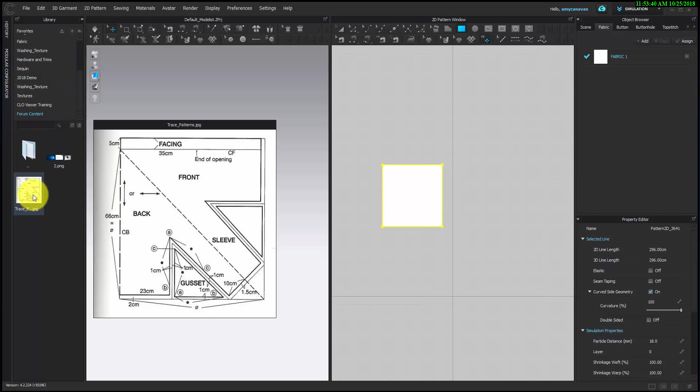Next, you're going to apply the scan as if it is a surface texture. Now we want to figure out how to get our scan to be the same size as our true-to-life pattern. So the next thing I'm going to do is use the internal polygon and line tool to create a reference line so that I know how big the texture needs to become. In this case, mine is 66 centimeters.

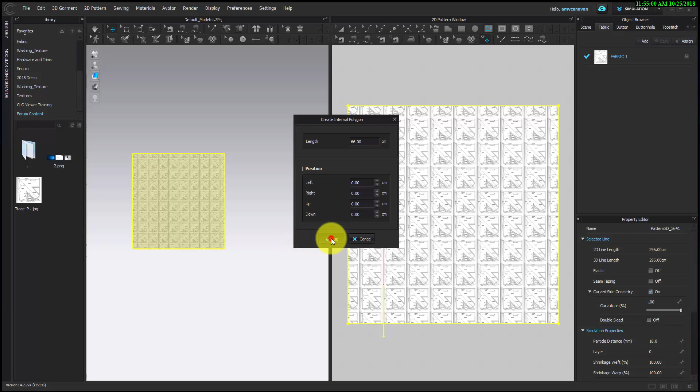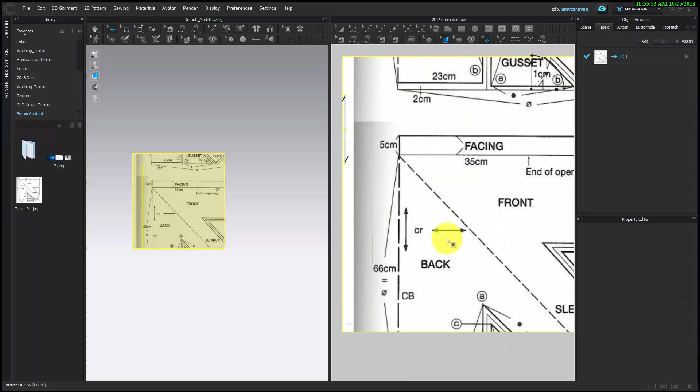Once I have my line, I'm going to adjust it on the pattern to get it so that it's centered there as a reference for me. And then I'm able to scale my textures by clicking once on the pattern piece and then using the diagonal line to drag and make that texture larger or smaller, always clicking and dragging on the pattern piece to align my reference mark on the pattern with the reference line that I drew in CLO.

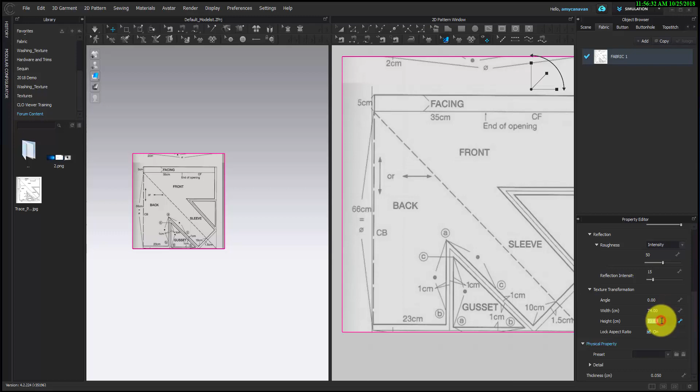If you'd like, you can click on the texture and then on the fabric itself, and open up the tab for texture transformation. If you know your image size, you can also scale it automatically there to match your proportions. In this case, I wanted to get it as close to 66 centimeters as I possibly could, so I manually increased the height centimeter by centimeter until my line lined up exactly.

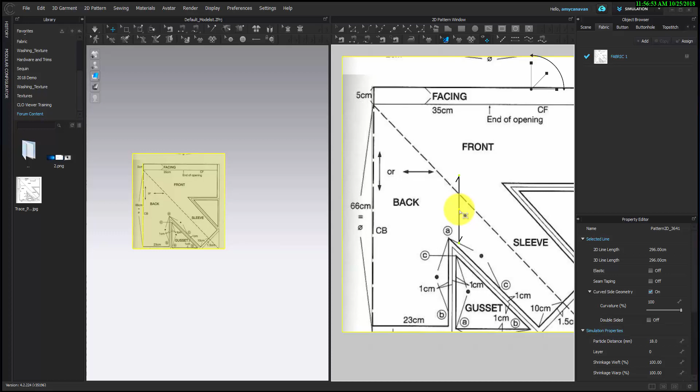Once the texture is aligned exactly where you'd like it, you can delete that reference line as you won't need it anymore. And then you're ready to trace out your pattern.

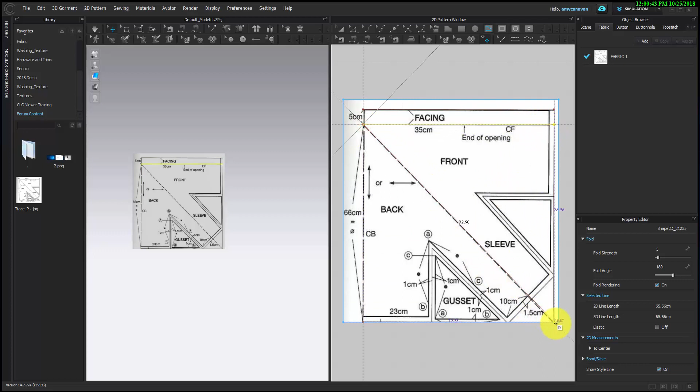So with the internal polygon and line tool, I'm going to simply trace the pattern edges. I'm going to trace the reference shoulder line and the facing piece, as well as some of the seam allowance.

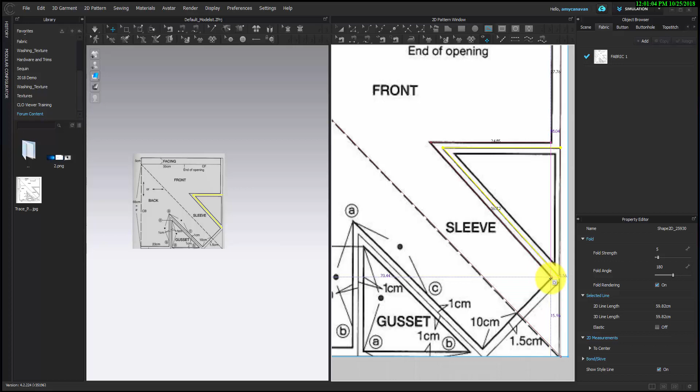And the body pattern. Don't be afraid to zoom in so that you can be very precise.

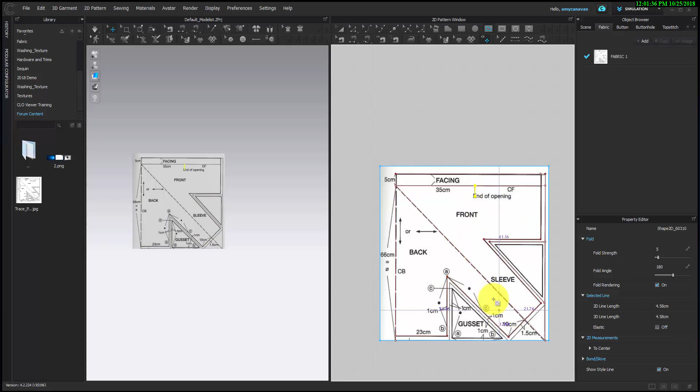Once I've traced the body pattern, I'm also able to mark out where the center front opening should be and trace each gusset.

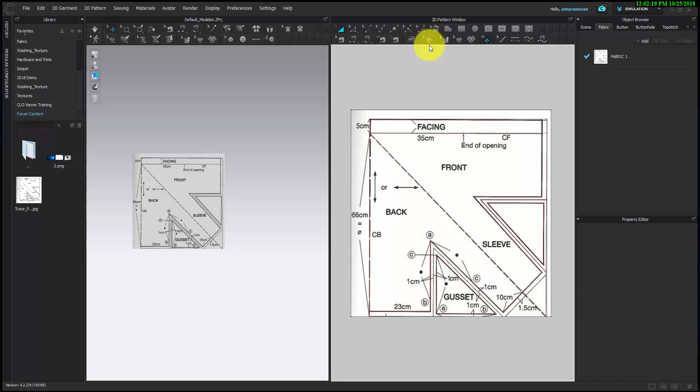Once I have all the lines that I need, I'm going to turn off the textures in the 2D window so I'm able to check the pattern.

The next thing I'm going to do is with the transform pattern tool, I will right click on the gusset pieces because they are full shapes, and I will clone them as a pattern.

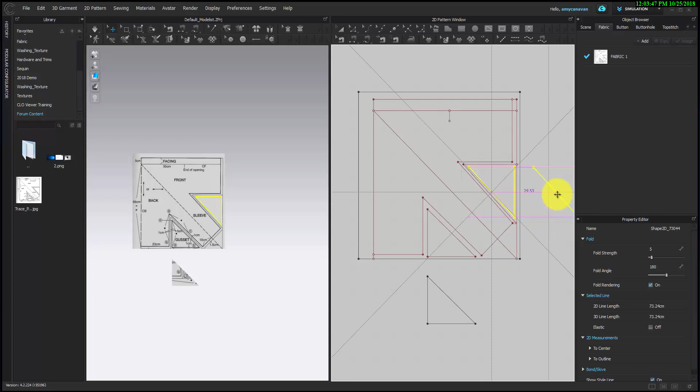However, for the body pattern, I'm going to need a different tool, called trace, as well as for the facing. So for trace and for the facing piece, I can select all of the lines that are interacting with the facing, right click on one of those lines and choose trace as a pattern.

With the body pieces, I'm going to trace the exact same way, selecting only the outside edges that I need. Right click and choose trace as a pattern.

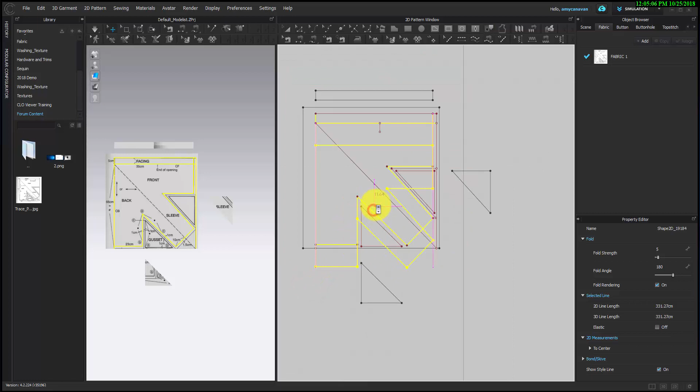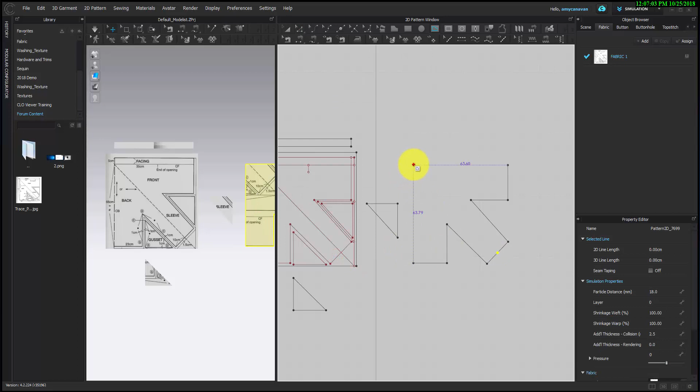Now I have a facing, a body, and two gussets. To mark my shoulder line, I'm going to split the sleeve in half and then draw an internal line from the top point to the split.

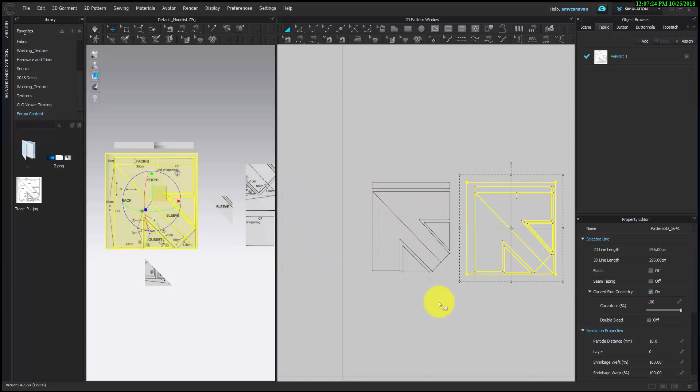I'm also rearranging and organizing my pattern pieces to make them a bit easier for me to understand, as now I'm going to have to put this together. So I'm going to move my scan and tracing out of the way and just work on the pattern pieces that we just created. I'm going to bring in one of the default avatars into my 3D window.

Then I can do a select all and move those patterns out of the way in 3D so I can just focus on the avatar.

Right now I'm marking the center front so that I know how far to sew to. And naming my pattern pieces, so select the pattern piece and type in the name that you'd like, and that will always be there.

Since I only have half a pattern, I'm making a symmetric copy so that I'm able to just sew half of my pattern.

Now that I have both sides, I am able to start looking at arrangement. So I'm shifting the pattern pieces over in the 2D window to make it a little bit easier for me.

Then I'm selecting the body piece and adding it to one of the arrangement points.

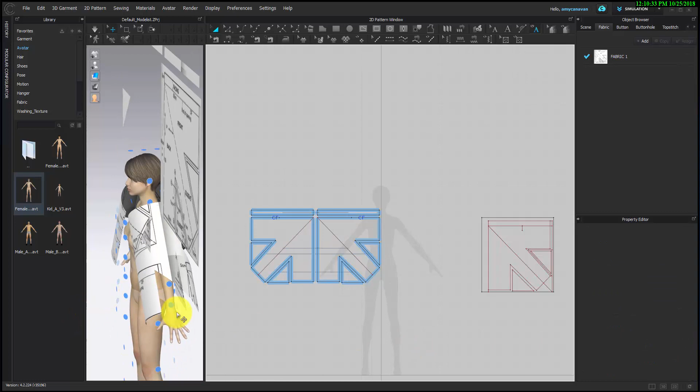Since this is kind of an amorphous shape, it's a bit challenging to use the arrangement points. However, I selected one on the arm, and in the property editor under arrangement, I changed and increased the offset to 100 so that it would be farther away from the arm, so as to wrap around the whole body.

Then I realized I put it on backwards, so I switched it around.

Now I can see clearly that my center backs are on the back, and I'm marking those with a pattern annotation.

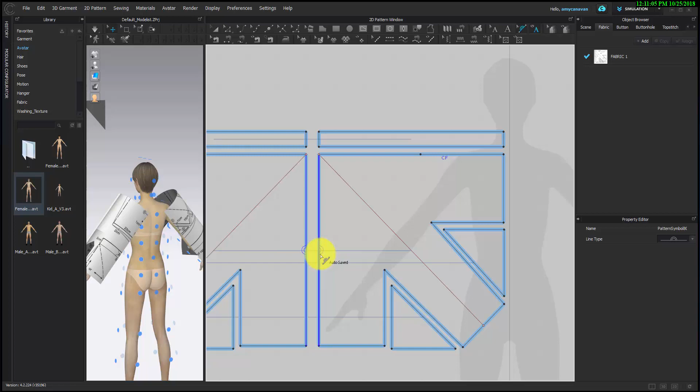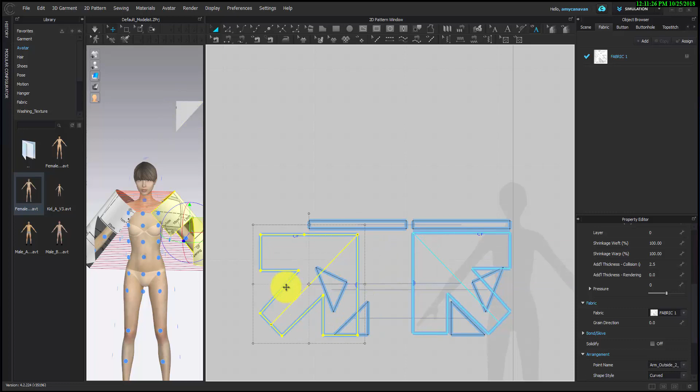Now I'm sewing the center back and center front together. I'm also going to sew the gussets into the sleeve. However, I'm going to rotate them slightly as they get sewn in a different direction than they are cut.

Using free sewing, I'm able to select the shorter edge, and the directional sewing indication notch will tell me how far down on the sleeve I'm able to go.

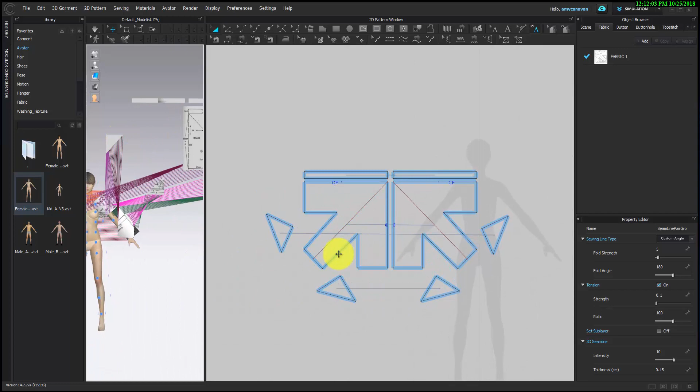Because I have a symmetric pattern with sewing, I'm able to only sew one side. Instead of bothering to arrange these with arrangement points, I just superimpose them to the side. And once I'm ready...

I assign it to a new, more plain fabric, and I'm able to simulate.

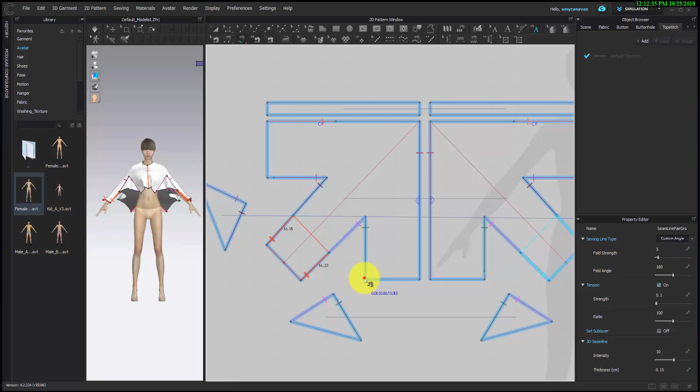I can see here that I still have not sewn my undersleeve seam, so I'm doing that with free sewing now, where I select the wrist area, as well as the side seam, which is still unconnected.

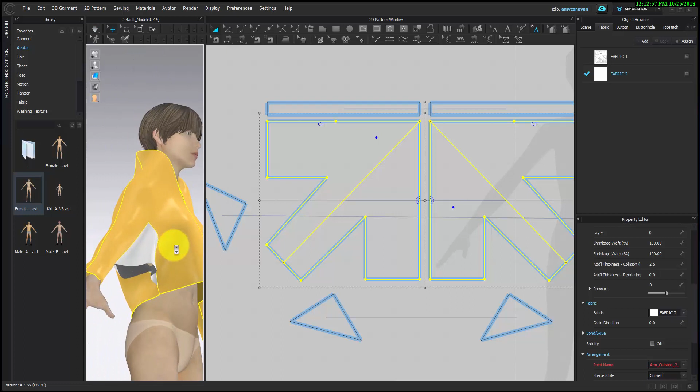To give the back more rigidity, I am strengthening those pattern pieces and allowing them to simulate in their strengthened state, which is a temporary setting.

Then I sew the gussets closed, and unstrengthen the pattern.

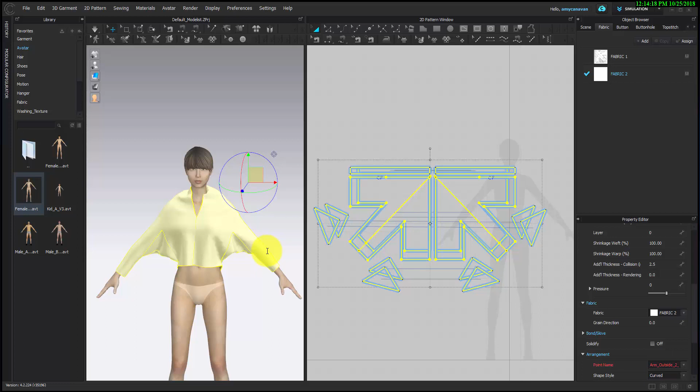Then I made the entire pattern 5% larger, bringing it to a total of 105%, so that I could adjust the fit slightly.

Now I'm measuring the width of the facing, and I'm offsetting an internal line from my center front so that I am able to sew the facing into the front of the garment.

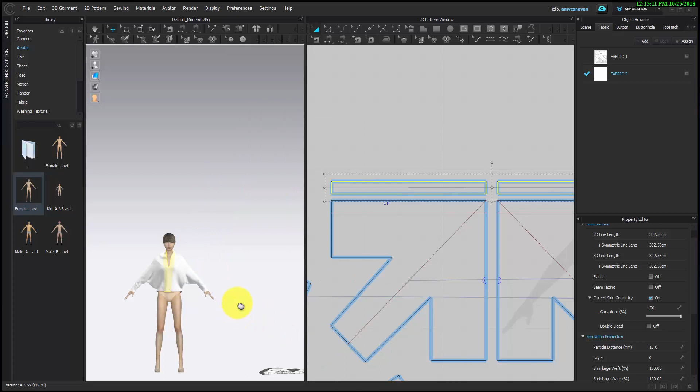Since these patterns were not in use, they were deactivated. I'm activating them and superimposing them underneath the body fabric.

Here I'm checking to ensure that all of the sewing seam line types for the facing are set to turned, because that will press the seam closed as opposed to open.

Next, I'm ready to change the pose. So I select a new pose, change the joint rotation and translation, and I'm watching my avatar change from T-pose to attention pose.

I'm able to delete my original tracing because I don't need that anymore now that I have my pattern.

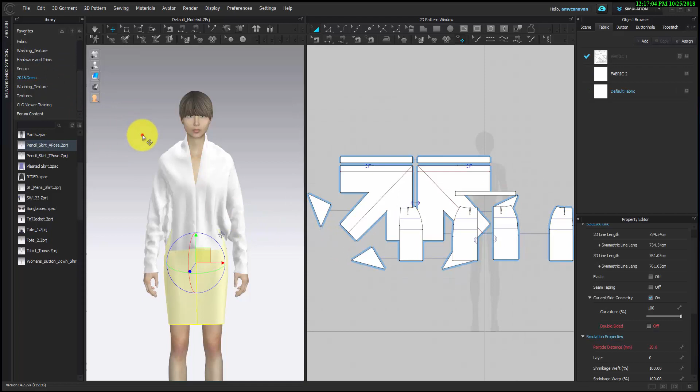Now I'm adding another garment into my workspace. So I've added a skirt. I've unchecked avatar on the additional import.

And moving the pattern pieces out of the way so that I can still freely edit everything.

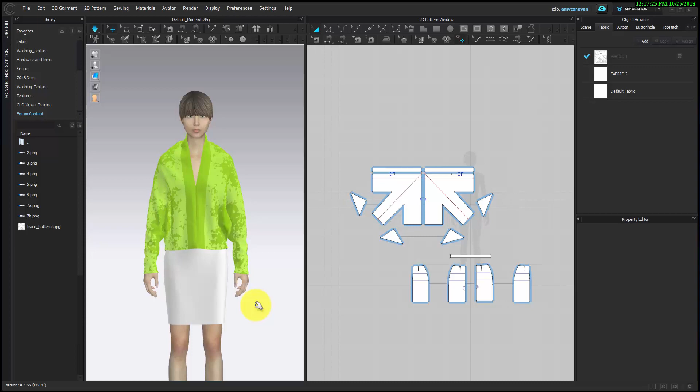Now I'm turning the jacket pattern pieces to layer 1 so that they'll simulate on the outside of the skirt. However, once they are simulating and the jacket's not tucked into the skirt anywhere, we can remove that layer 1 option. It's a temporary setting.

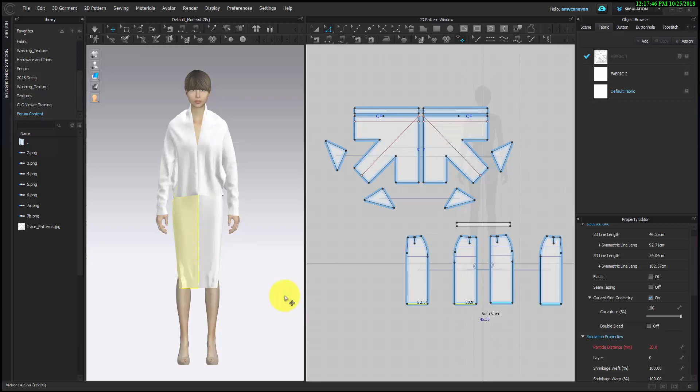I've decided I'd like my skirt to be a little bit longer, so I'm dragging the hem down with the edit pattern tool and resimulating here.

Next, I will delete the center front sewing and simulate so that the entire center front opens.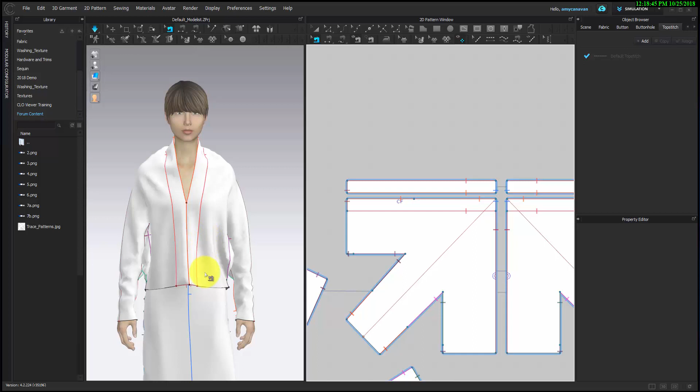Once I can see both edges, I choose the zipper tool from my 3D toolbar. Click once to start, double click to end.

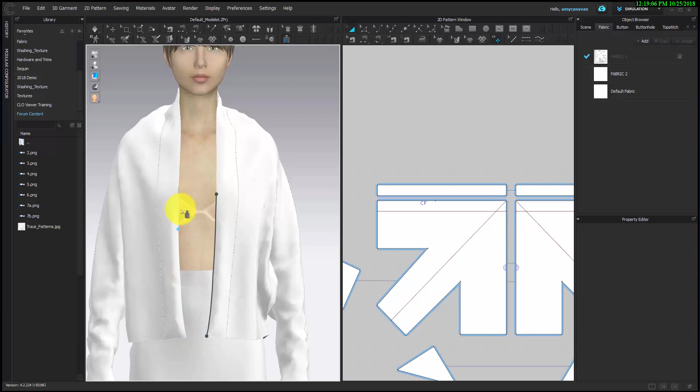On this side, because I had no pattern marking, instead of going from the top to the bottom, I decided to go intentionally from the bottom to the top, which led the zipper to come in reversed. However, I simply need to right-click on it with the Select and Move tool and choose Reverse. It's a good tip for when you don't have a marking for the end of your zipper.

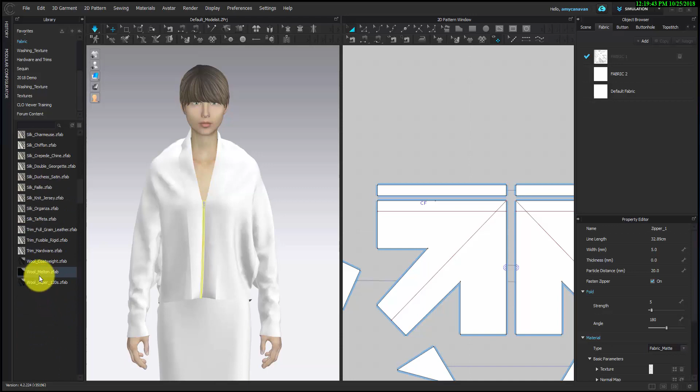Once I've finished adding the zipper, I'm ready to choose some fabrics. So I'm sampling here by hovering over, and it's giving me a preview of the type of fabric, a thumbnail of the texture, as well as some information about the weight and all of that kind of good stuff.

So I've dragged and dropped the Super 120's wool onto my fabric, which is representing my jacket, and simulating to see how the drape has changed with the change of fabric.

Then I select the zipper tape, and I am going to overlay a color that more closely matches the color of the jacket. So I can either select a chip or use the color dropper and hit OK.

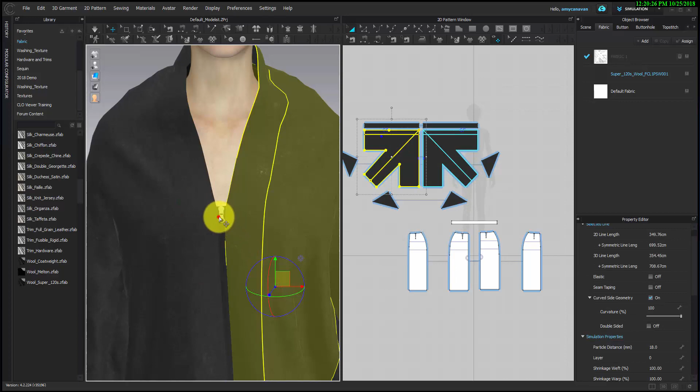Similarly, I can adjust the color, material type, and shape of the sliders and pullers of the zipper by clicking on them as well.

That one looked a little dark, so I'm lightening it up based on the preview behind the window in the 3D window.

Now I'm choosing a velvet fabric for the skirt.

And merging the center front pieces of the skirt together so that there is no longer a seam.